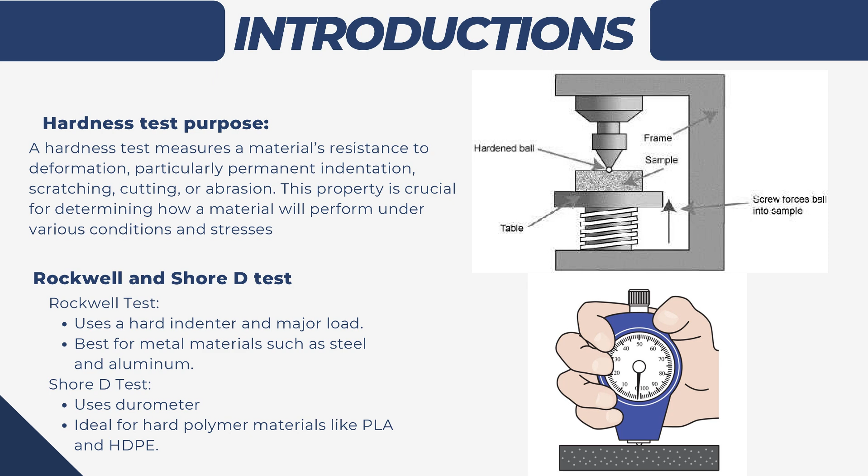So we're moving on to the test overview section, where I'm going to be discussing what the students have done for the hardness test from the beginning until the end. First of all is to obtain the dimensions of the specimen. Students are required to use a vernier caliper in order to obtain the dimensions of the specimens.

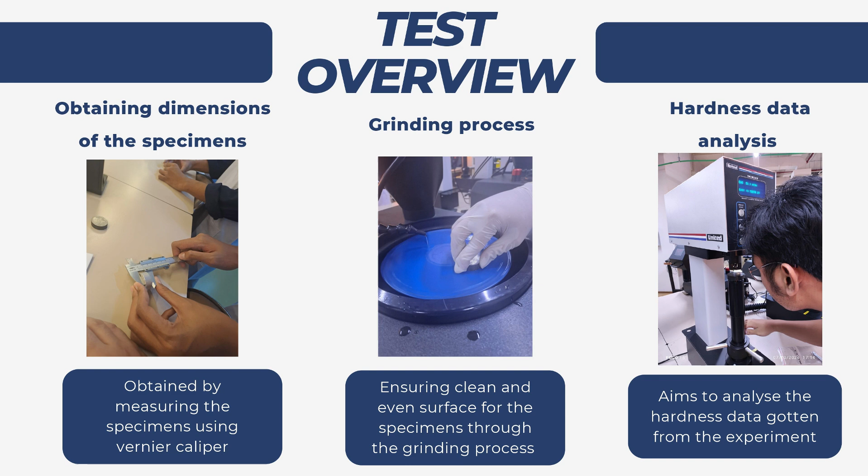After the dimensions have been obtained, we move to the grinding process. Students are required to grind the specimens to get a clean and even surface so the specimens qualify for the Rockwell test. After that, students take their specimens and conduct a Rockwell test, and then analyze the hardness data obtained from the experiment.

For steel, we use the HRA scale, and we get an average hardness number of 51.5 with a standard deviation of plus minus 0.47. Whereas for aluminum, we use the HRBW scale, and we get an average hardness number of 55.06 with a standard deviation of plus minus 0.82.

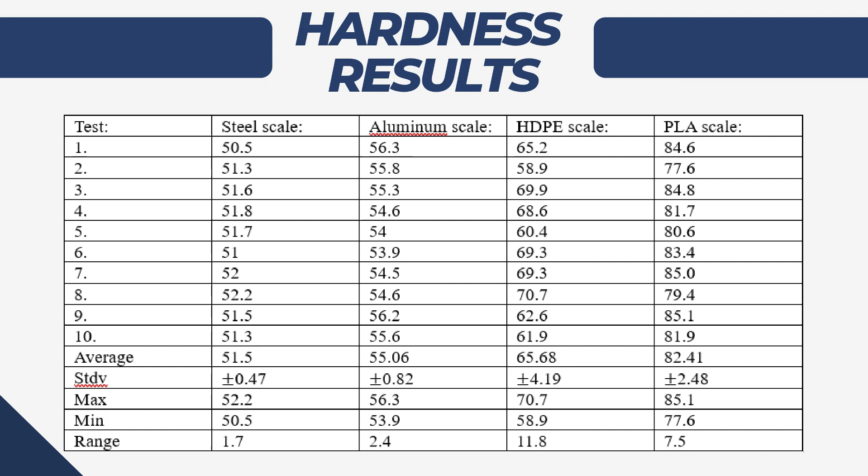We can also measure the polymer materials such as HDPE and PLA using the Shore hardness test. For this experiment, we get an average hardness number for HDPE of 65.68 with a standard deviation of plus minus 4.19, and for PLA an average hardness number of 82.41 with a standard deviation of plus minus 2.48.

So we're moving on to question number 2, where students need to discuss the concept of the hardness test in general and why it is important. As I mentioned before, the hardness test is important because it can measure the material's resistance to deformation, and it is also important for testing material performance as it determines how materials perform under stress.

Other reasons hardness tests are important include helping in choosing the right material for specific applications and ensuring materials meet required specifications before manufacturing. Since it is non-destructive testing, it doesn't alter the product, which makes it suitable for finished goods. It is also a good indication of whether a material is wear resistant, since higher hardness typically indicates better wear resistance. Also, hardness can be correlated to other mechanical properties such as tensile strength and yield strength.

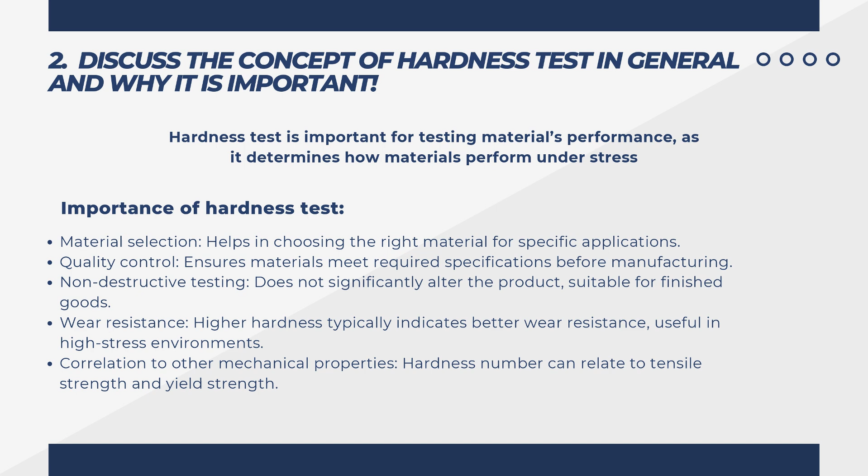On the other hand, HRB uses a 1/16-inch ball indenter, which is meant for softer materials such as aluminum, which can result in excessive penetration when applied to harder materials, yielding inaccurately low values. So using the wrong Rockwell scale can compromise measurement accuracy and reliability.

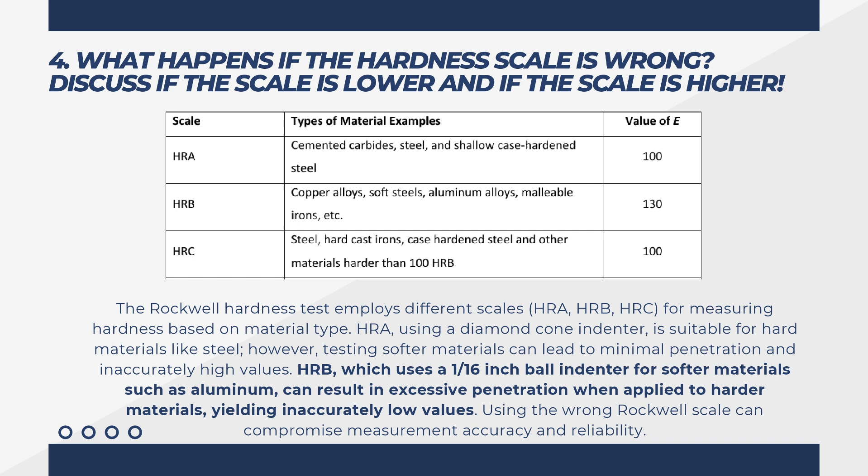On the other hand, Shore D is designed for hard materials, hard polymers such as HDPE and PLA, which can result in excessive penetration and inaccurately high values when testing softer materials. And the same thing also applies to Shore B and Shore C.

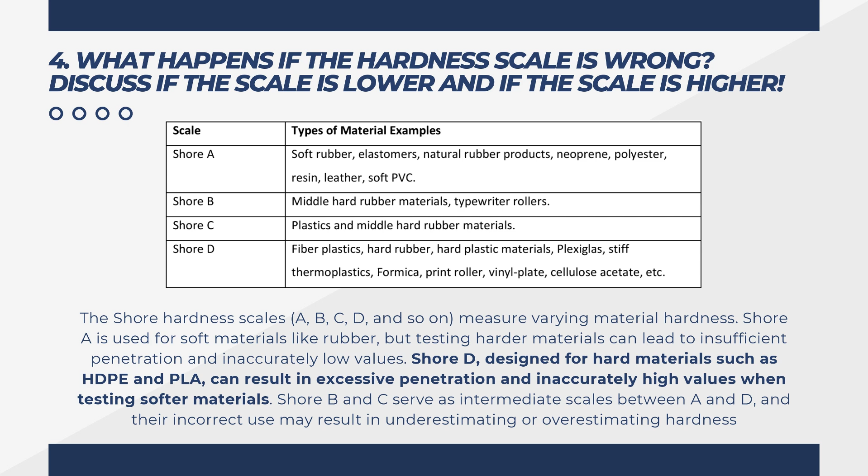So moving on to the fifth question, where students are told to describe the benefits and limitations of Rockwell and Shore D hardness tests. There are several benefits and limitations of testing material hardness using the Rockwell hardness test. The first benefit is that it is a quick and easy process, which means that immediate results can be instantly gotten, which is ideal for routine quality control.

The Rockwell hardness test is also famous for its non-destructive manner, which only creates a small indentation without significantly altering the material. The other benefit of the Rockwell hardness test is that it is versatile and standardized, which is suitable for various materials, whether metals or alloys, and differing hardness levels.

Also, the Rockwell hardness test has been widely recognized and standardized by ISO 6508 and ASTM E18, ensuring its reliability and consistency. However, there are several limitations. Strict surface preparation is required, meaning that the specimen surface must be very smooth, clean and even for accurate results. This requires the user to put in more effort, such as grinding the materials, in order to get an accurate result.

The Rockwell hardness test is also not suitable for thin materials, since the indentation depth of the indenter can exceed the thickness of the material, which can lead to inaccurate readings or even fracture.

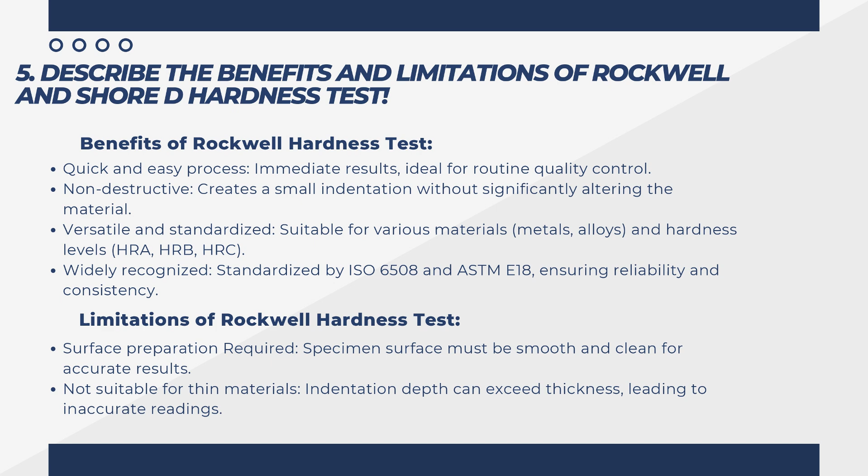So we're moving on to the benefits of the Shore D hardness test. The first benefit is that it is ideal for rigid polymers, meaning it can cover varieties of hard plastics or semi-rigid polymers such as HDPE and PLA. Also, it has a simple and portable manner of measuring hardness, since it uses a portable durometer, which is applicable in various settings. The Shore D hardness test also has a wide range of applications covering a broad range of hardness levels.

Putting aside the benefits, there are several limitations of the Shore D hardness test. The first limitation is that it has strict surface requirements. The specimen requires a very flat, even and smooth surface for accurate readings. If irregularities or an uneven surface occur, the result may become inaccurate.

The second limitation of the Shore D hardness test is that it provides limited material information. It is not like the Rockwell test, which can be correlated with tensile strength. The Shore D hardness test does not provide data on properties such as tensile strength, abrasion resistance, or wear resistance.

The last limitation of the Shore D hardness test is that human errors may occur from time to time. Human errors such as incorrect durometer placement and inconsistent force application can lead to incorrect measurements.

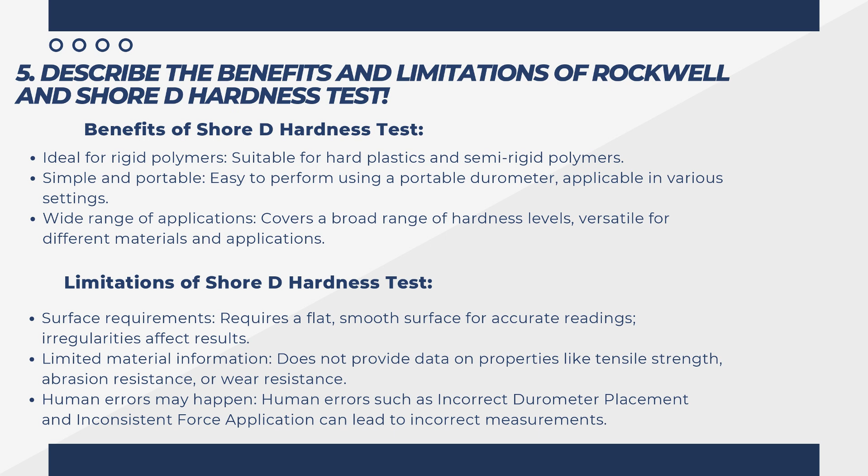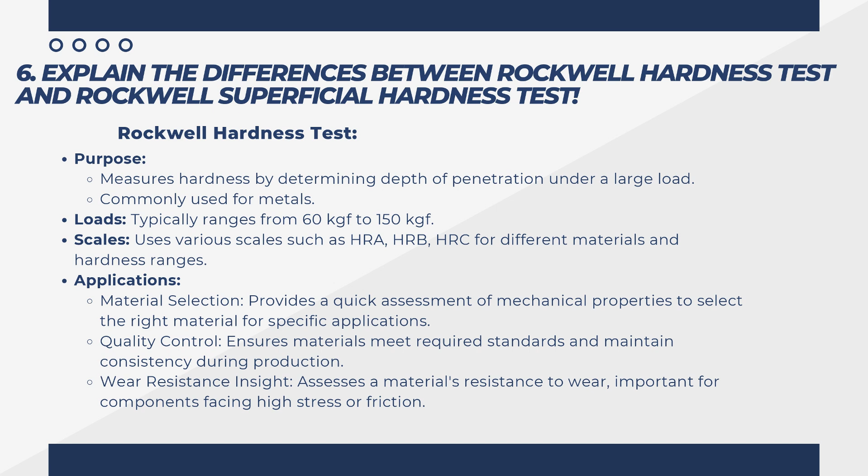The Rockwell hardness test uses various scales such as HRA, HRB, HRC, and so on, depending on the material's hardness and mechanical properties. And the applications of the Rockwell hardness test are still the same as we discussed before. Comparing to the Rockwell superficial hardness test, its purpose is to measure the hardness of thinner materials or materials with surface treatments.

However, it's still following the same principles as the standard Rockwell test and is suitable for surface-sensitive testing. The loads that are being used for the Rockwell superficial hardness test are relatively lower than the standard Rockwell test, typically ranging from 15 kgf to 45 kgf in order to avoid damaging thin or delicate materials.

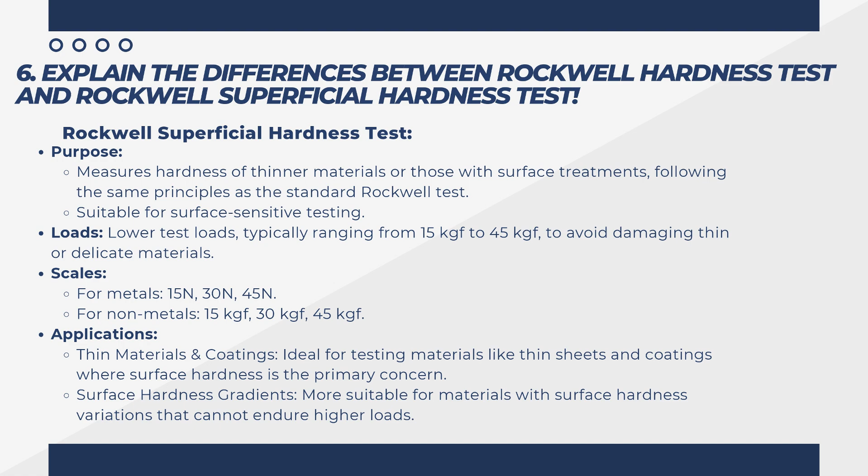Moving on to number 7, where students are expected to predict the tensile strength of a specimen from the Rockwell hardness number. We can get the tensile strength value of a steel specimen from the hardness number HRA, which is gotten from the test. First of all, we must convert the HRA to HRB using the Rockwell hardness conversion chart that we get from the internet. As can be seen, we've converted 51.5 HRA into an 83.6 HRB hardness number.

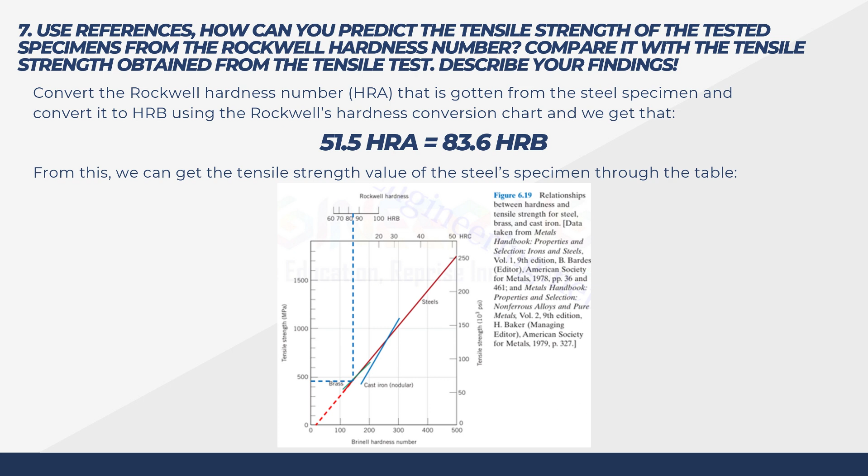So after converting the HRA hardness number to HRB, we can get the tensile strength value of the steel specimen through the graph from the book Materials Science and Engineering: An Introduction by Callister W.D., Rethwisch D.G., 8th edition, page 179, made in 2009. So after creating lines and connecting the HRB hardness number to the tensile strength in MPa, we get the value of 470 MPa approximately.

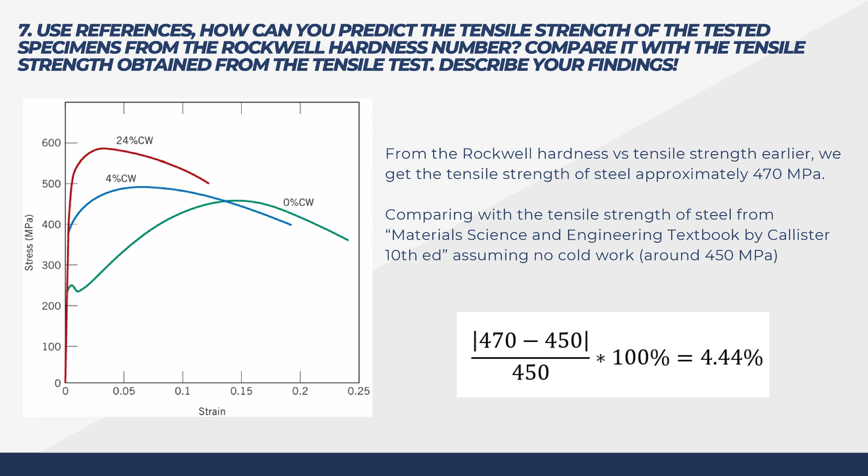Comparing to the tensile strength of steel from the Materials Science and Engineering textbook by Callister, 10th edition, the tensile strength of steel from the stress versus strain graph is around 450 MPa. And comparing both results, we get a 4.44% error value, which I think is pretty accurate since we predict the tensile strength of the specimen only by using the hardness number.

So we're moving on to the next question, where we are tasked to compare the material characteristics between hard steel and plastic by comparing their hardness values. As can be seen from the table, the hardness of hard steel is relatively high with a 40 to 65 hardness number in the HRC scale, whereas the hardness number of plastic is considerably low with a value of 60 to 85 Shore D hardness number.

Materials like hard steel, which has a high hardness number, typically also have high strength, wear resistance, and thermal stability, and the weight of the material is relatively heavy compared to materials with low hardness. Plastics, on the other hand, which have a low hardness, also typically have low strength, low to moderate wear resistance, low thermal stability, and usually a very light weight compared to steel.

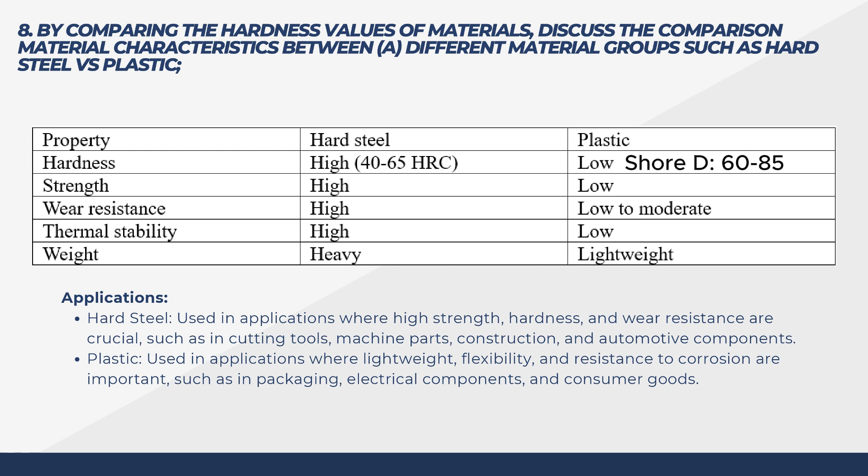The applications of the two materials are also very different, where hard steel is usually used in applications where high hardness and wear resistance are crucial, such as in cutting tools, machine parts, and construction, whereas plastics are used in applications where light weight, flexibility, and resistance to corrosion are important, such as in packaging, electrical components, and consumer goods.

The applications for 440C stainless steel are knives, bearings, and valves, so basically products where wear resistance and hardness are critical, whereas 440A stainless steel is typically used for machining due to its more ductile property, which is better suited for applications that need toughness.